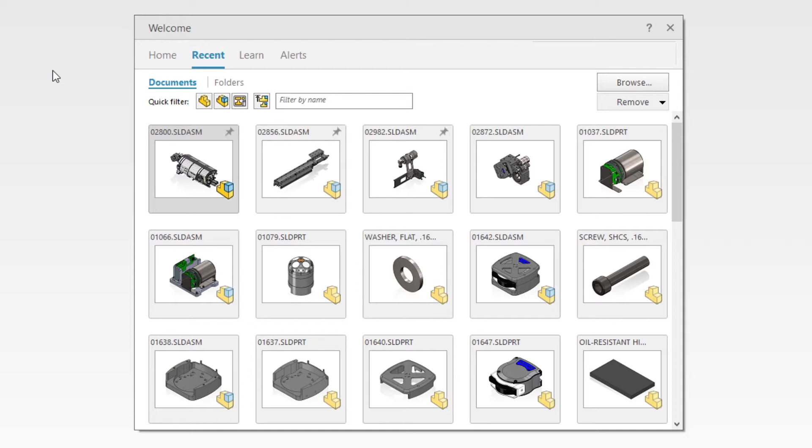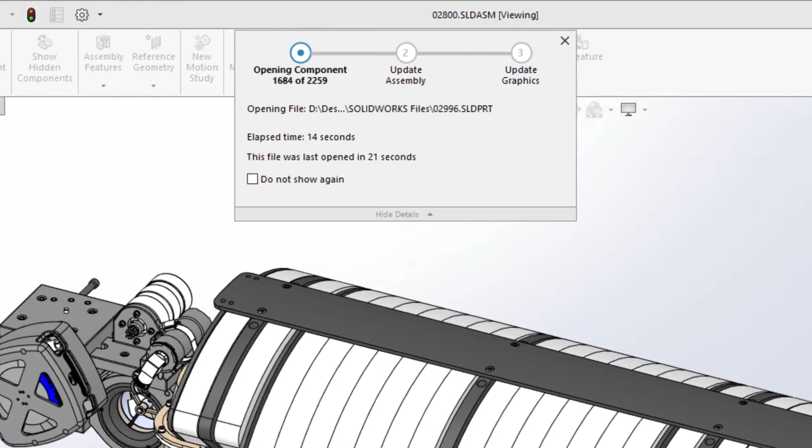You demand the best performing tools so you can work as efficiently as possible. SOLIDWORKS 2021 delivers multiple new enhancements to access your data faster and work more efficiently. Open times for both resolved and lightweight assemblies have been improved in SOLIDWORKS 2021. This 2259 component assembly opens in only 21 seconds, making getting into your designs faster than ever. The larger the assembly, the greater the gains you will see while opening them in lightweight mode.

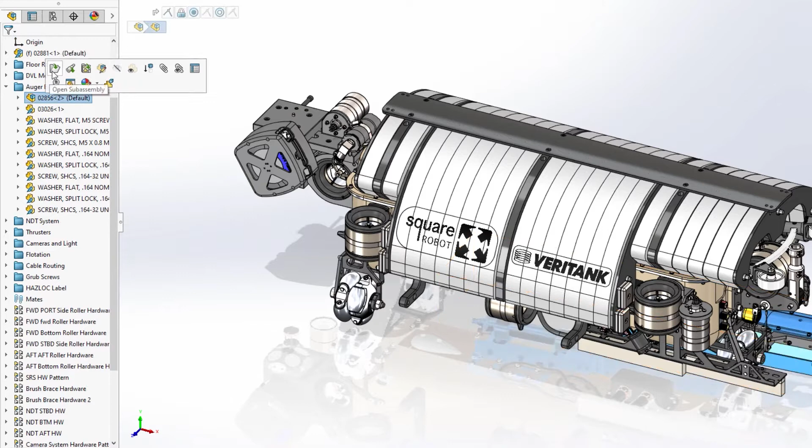To improve working with lightweight components, there is now also a more streamlined approach to accessing their assembly and feature information. Simply expanding a component from the Feature Manager tree will now dynamically load those components on demand, giving you access to the fully resolved subassembly or part. This prevents unnecessary loading of large assemblies, but also allows you to quickly access and resolve the components you're working on as needed.

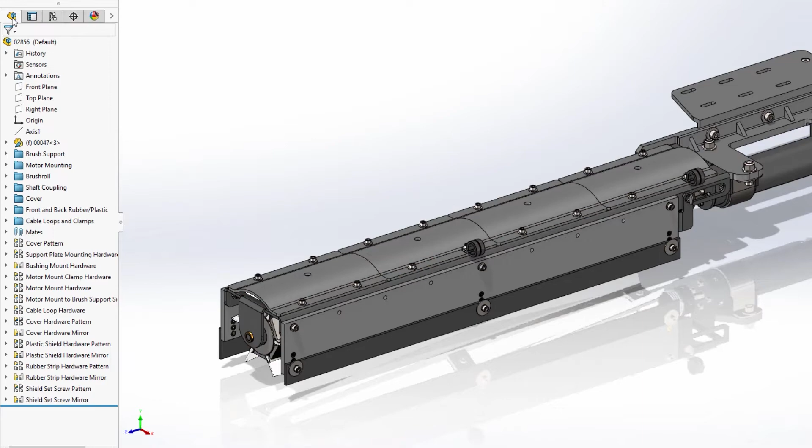Working with configurations in SOLIDWORKS 2021 is now also faster. Both switching between and creating new configurations are now significantly faster for assemblies.

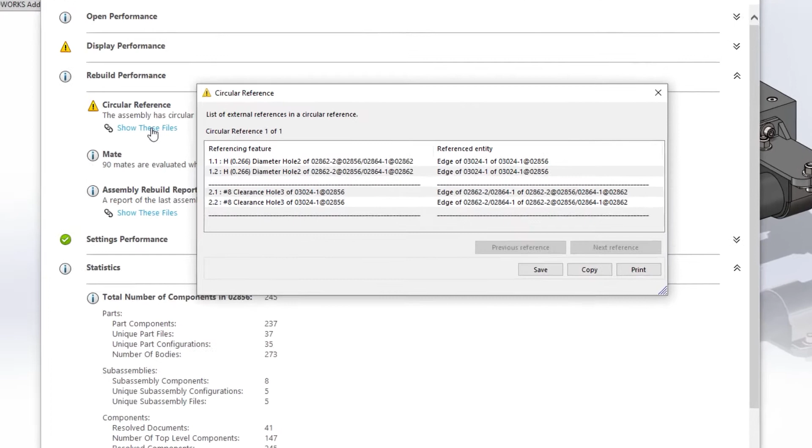The Performance Evaluation tool within SOLIDWORKS has always been an invaluable resource to give insight into areas of a design that may cause performance degradation. New for SOLIDWORKS 2021 is the analysis and reporting of circular references within an assembly. In this case, two holes on two separate parts have been found to reference one another. You can use this information to further investigate the design and determine how they're referencing one another to fix these issues.

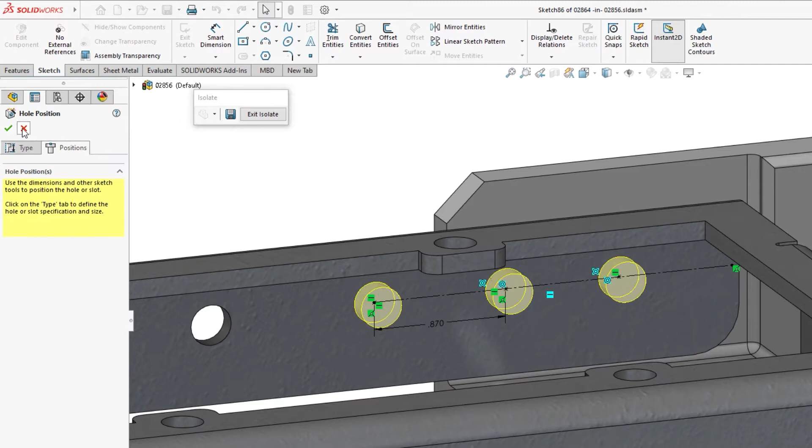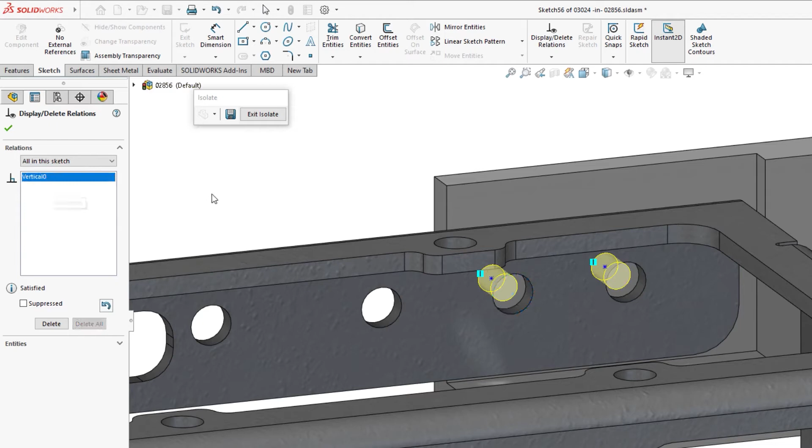In this scenario, one of the components listed in the report contains a hole wizard feature, where its location sketch has center points that are referencing the edges of a hole in the adjacent part to locate them concentrically. This is a common top-down design practice to ensure that holes always remain aligned to one another. However, on investigation of the second component's feature, also a hole wizard, it appears that the center points within this sketch are likewise referencing the edges of the previously interrogated holes. This creates a circumstance where both features are trying to define the location of each other, or a circular reference.

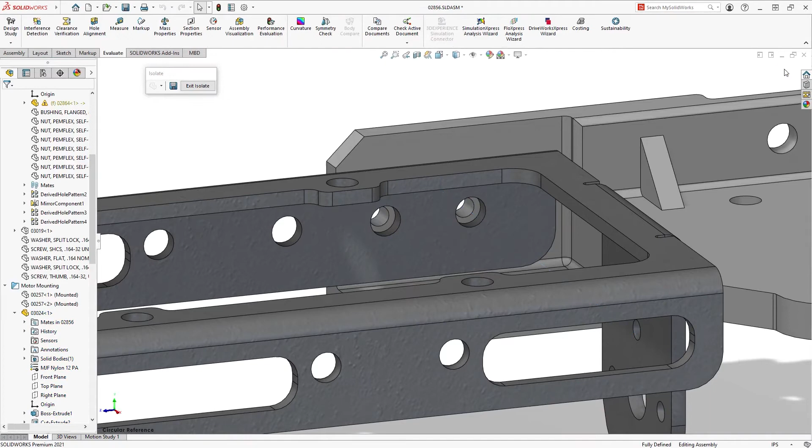To fix this scenario, the best course of action would be to remove the external references and redefine the location of the hole centers in one of the sketches, in this case dimensionally to the part they reside within. Once the changes have been made, a quick rebuild removes any warnings from the assembly.

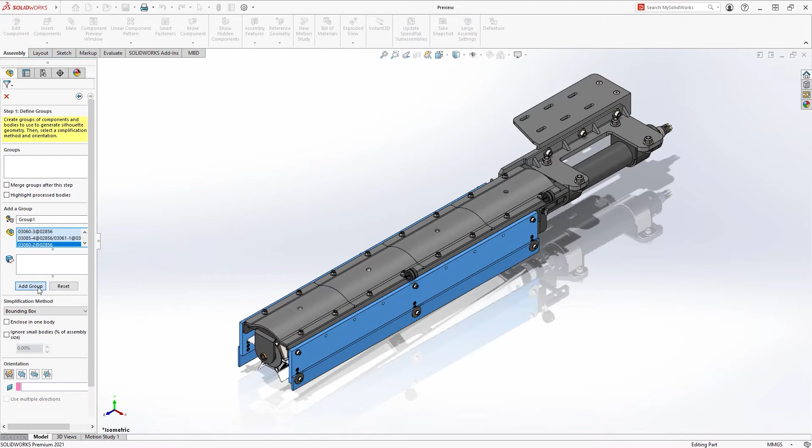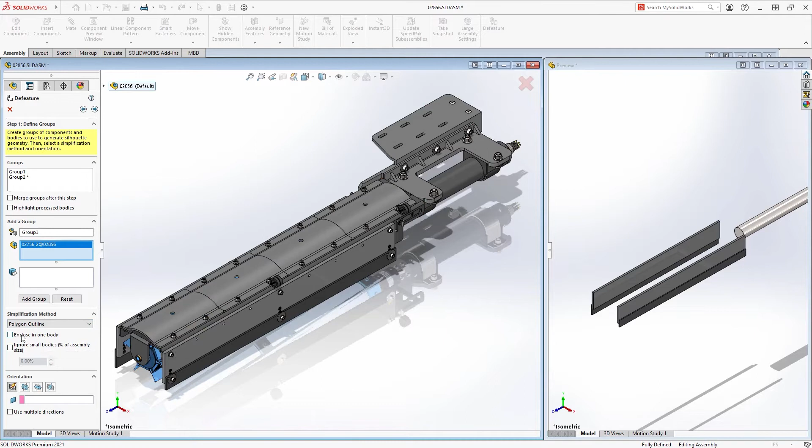Finally, you can use Defeature, introduced in SOLIDWORKS 2019, on an assembly to create a simplified representation of it, or to protect proprietary information. Defeature provides an intuitive step-by-step workflow to define this simplified version using a variety of geometry simplification tools. While you are selecting the components, bodies, or subassemblies you want to simplify, you will always have a side-by-side view to show what your finished representation will look like. This ensures that you can capture the correct amount of detail.

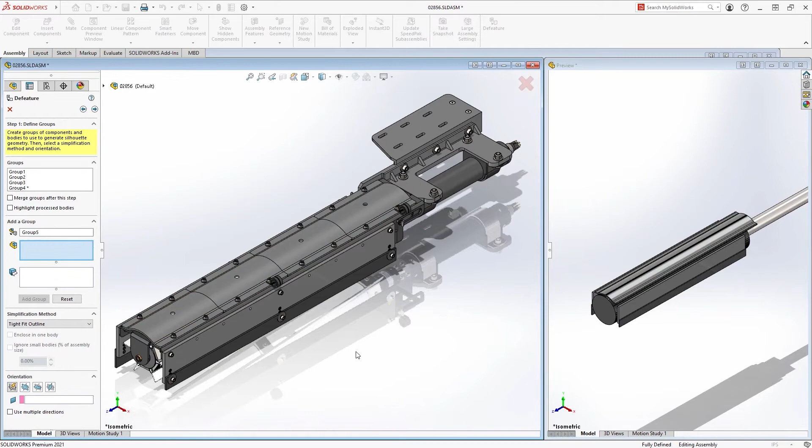The methods you can use to simplify your geometry range from something as simple as a bounding box or cylindrical representation of the components, or something a little more complex, like the polygon or tight fit methods, which add a little bit more detail to the final results. Perhaps some of the components in your subassembly are critical to show in a top-level design, even within a simplified representation. For those instances, you can choose the copy geometry method to capture all of the detail of those components, bodies, or subassemblies.

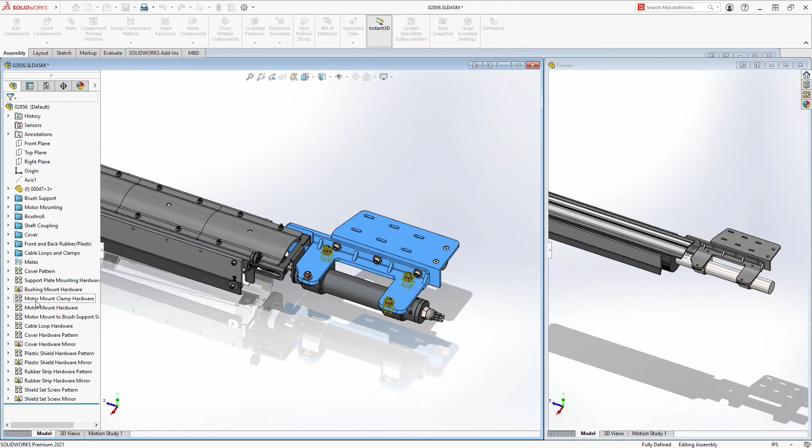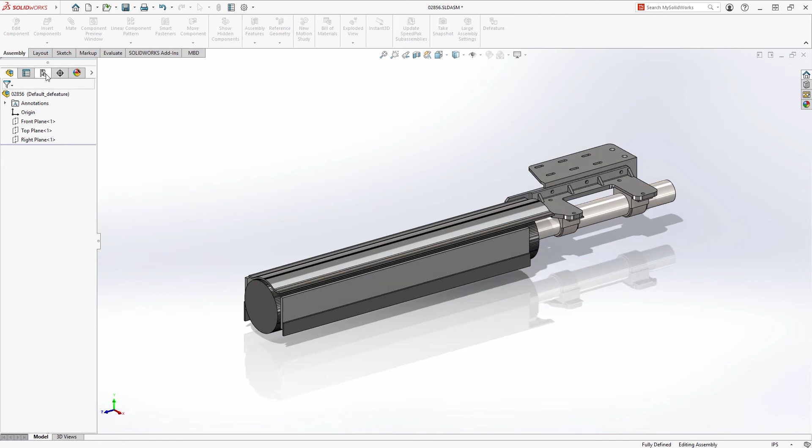What's new for Defeature in SOLIDWORKS 2021 is the ability to save this simplified representation as a configuration within the same assembly from which it was created. This eliminates the need to manage a separate file that contains the simplified model. You may still want to use those other methods when using Defeature to remove proprietary information from a design to share outside of your organization as a separate disconnected file.

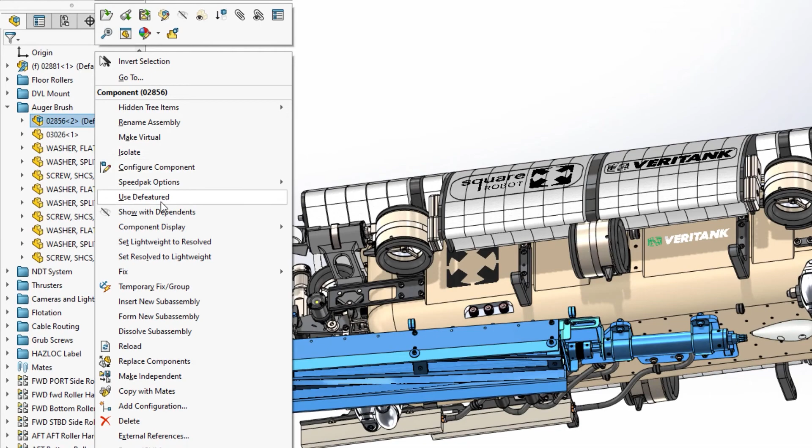However, when using defeatured models within higher level assemblies, it is now as simple as right-clicking on the component and choosing to use the defeatured version. Defeatured assemblies as configurations provide a way to both simplify complex assemblies visually and also add a performance boost in cases where the detail of the individual components isn't necessary. With these new performance-oriented features in SOLIDWORKS 2021, you will be able to work faster and more efficiently with larger and more complex designs.